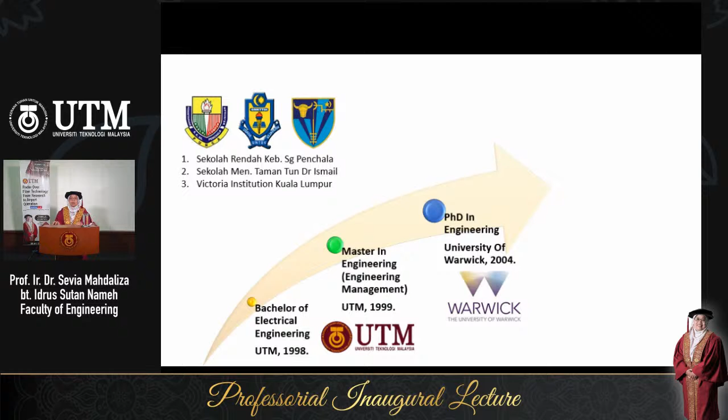Seterusnya saya menyambung belajar di UTM. I am alumni of UTM, bachelor degree and master degree, supervised by Professor Engineer Abu Samah and Dato' Ahmad for my final year project and master's. Professor Abu Samah is my sifu, my academic advisor. He was not just my advisor during my study, but until now as a colleague in UTM. Syukur Alhamdulillah, glad both of you are here, sihat walafiat. Thank you for your guidance since student until now.

Alhamdulillah. Then I continued my study at Warwick, 1999 actually, until 2004, under supervision of Professor Emeritus Roger J. Green, on radio over fiber, with my focus on radio over wireless optical link. Thank you, sir, I believe you are there in England. So happy he's still healthy and cheerful in England. We regularly keep in touch via IG, WhatsApp and also Facebook. I messaged him early morning today.

During my study, my senior next to me there, Dr. Ramirez Inigas, shared knowledge on optical communication. We worked together; he's now with Glasgow University. I graduated from PhD in 2004, with my Viva at Oxford University in November 2004. During that time, examinations were conducted at the external office at Oxford. Thank you, Professor David Edwards of Oxford University, my external examiner, as well as Dr. Mark Leeson of Warwick University, my internal examiner.

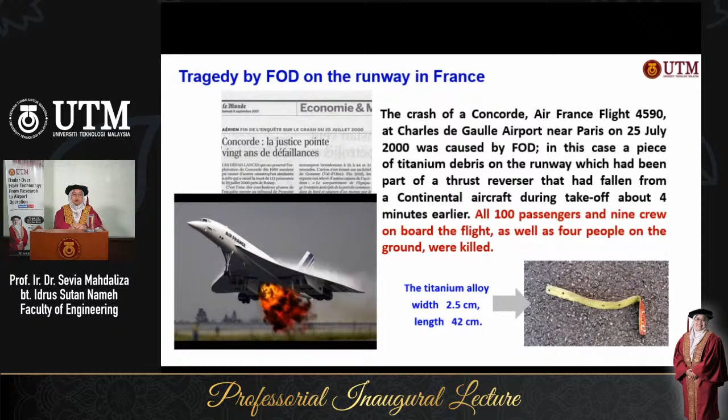This tragedy not just destroyed the aircraft, it also ended the business of Concorde. There is no Concorde anymore. It's history - bad history.

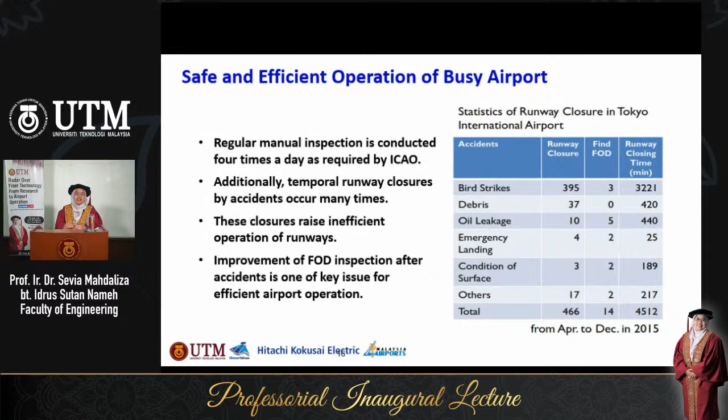Safety and operation of a busy airport require regular inspection, conducted 4 times a day as required by ICAO. Additionally, temporary runway closures due to accidents occur many times. This is a statistic of runway closures in Tokyo International Airport from April to December 2015. There are numbers of debris, and these closures cause inefficient operation of the runway, which is a cost to the airport operator. Improvement of FOD inspection after an accident is one of the key issues for efficient airport operation.

I'd like to share with everyone some public data comparing busy international airports. This report is from the ACI Annual World Airport Traffic Report 2015, showing the estimated direct cost of FOD and the estimated total cost. For example, for Kuala Lumpur International Airport, ranked number 37 in the world, FOD costs KLIA about 1.8 million USD per year, as well as 3.3 million per year in total cost. So we need technology to reduce this cost.

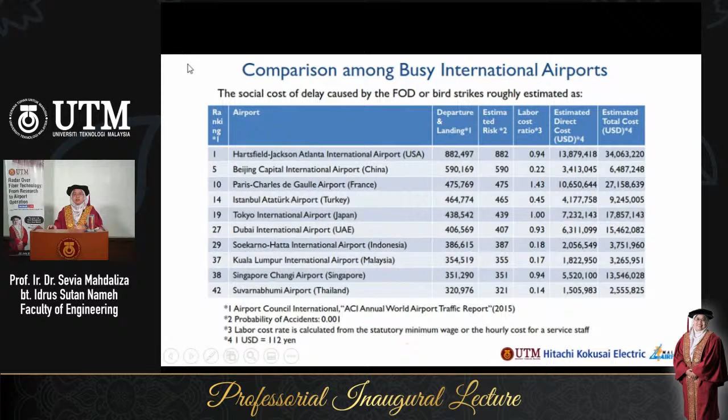One of the available technologies is laser or optical imaging - something like a camera. The camera can focus on the FOD and then inform the airport operator. However, we need a detection system for small metallic FOD. The system needs the capability to detect tiny objects and display the situation of runways 24 hours, 365 days a year, with many restrictions for construction and setup.

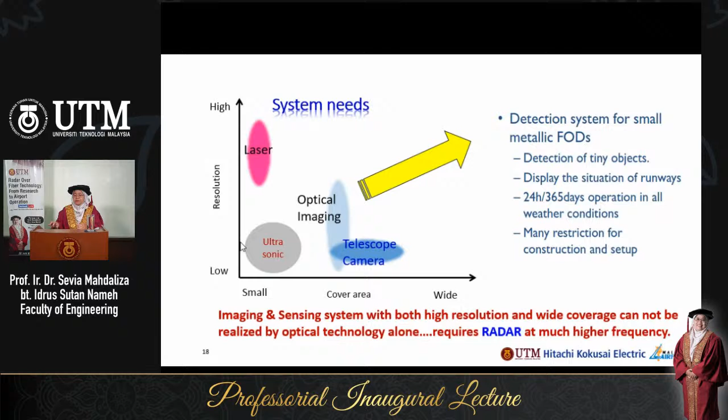In general, through our study, imaging and sensing systems with both high resolution and wide coverage cannot be realized by optical technology alone. It requires radar at a much higher frequency, in the millimeter wave region, because we need to ensure this runway - this is KLIA runway 2 - is clear from FOD.

What is radar? Allow me to share some basic understanding about radar. Radar stands for radio detection and ranging. It's a system that uses radio waves to determine the range, angle, or velocity of an object - to detect aircraft, ships, spacecraft, guided missiles, motor vehicles, weather formations, and terrain. The radar transmitter produces electromagnetic waves in the radio or microwave domain, and a receiver processor determines the properties of the object. There are a huge number of applications for radar.

If you can see here in this photo, there's a marine radar antenna for marine applications, and also airport civilian radar.

Do you have radar at your home? Okay, just ask you, can you spot a marine radar above me there? This is my photo at one of my project sites in Petronas, Melaka. Okay, you can see clearly there is a radar above me.

A little bit again about FOD radar theory. The radar works with the radar cross-section value, which, through the electromagnetic wave, can detect the size of the object and report through special signal processing.

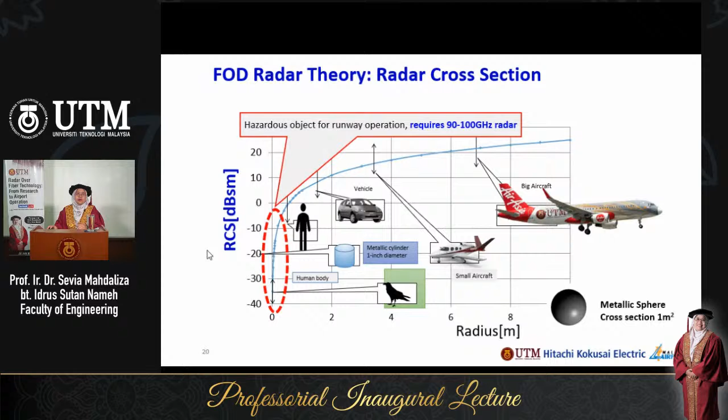So the smaller the size of the object, the shorter the wavelength and the higher the frequency should be. This is the range of hazardous objects for runway operation. It requires about 90 to 100 gigahertz radar.

Just a little understanding of how this electromagnetic spectrum works. If you look here, the source for AM radio, microwave oven, and so on. The size for AM radio, the radio we listen to every day, FM radio and so on, the wavelength is about the size of a building. But for radar and also microwave, it will be size like a butterfly, needle point, and so on.

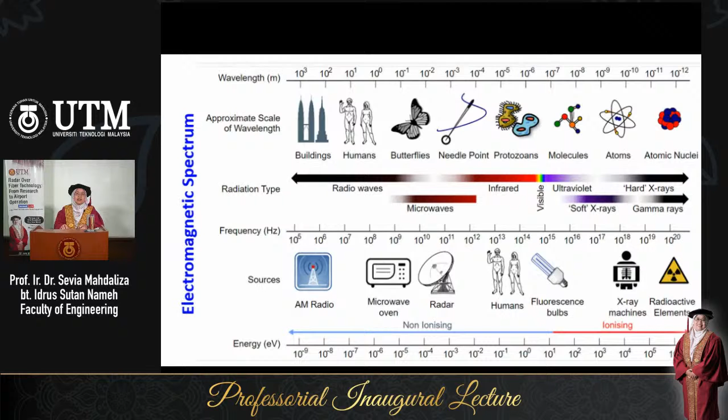At a certain spectrum it is non-ionizing, which is safe, with a certain high power level. And also for the next spectrum, after the visible and ultraviolet, there is the ionizing spectrum, which is soft X-ray, hard X-ray, and also radioactive elements, which is dangerous, but it's really useful with a proper design system for many applications.

Just to give some understanding of what radar is and where it works. For maritime radio and navigation, very low frequency and low frequency maritime radio navigation has a wavelength of about 1 kilometer. The frequency used is up to about 300 kilohertz.

AM radio is somewhere about 3 megahertz. And aviation radio, about 3 gigahertz now. UHF television, our mobile phone, GPS, Wi-Fi, 4G, 5G, and most of 5G now working towards 15 gigahertz to 30 gigahertz. But the FOD radar works at somewhere about 90 to 100 gigahertz. It's really far from those radar available in the airport area.

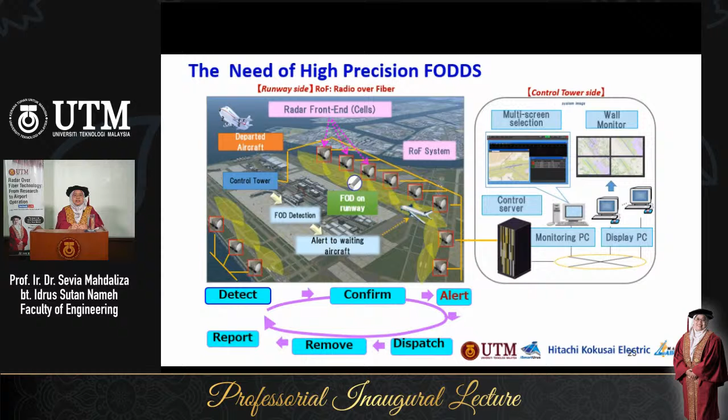The application: first it will detect, radar will detect, camera will confirm, and then alert through the system to the SI staff, dispatch and remove, report back, and open the runway. This is the simple algorithm for this system.

Just for understanding of our day-to-day use of radio fiber, every one of you here are connected through fiber. When you're looking at Facebook, when you're watching this talk through YouTube, definitely at the back end you are connected through fiber around the globe. So this is the example of radio over fiber application: mobile base station antenna, connecting mountain valleys using optical fiber, for tall buildings, and also subway metro.

All right, what is the RoF linear cell radar? The RoF system consists of many remote antenna units, linearly collocated along optical fiber to form a linear shaped cell. If you look here, there is a data center connected through fiber for joint signal processing.

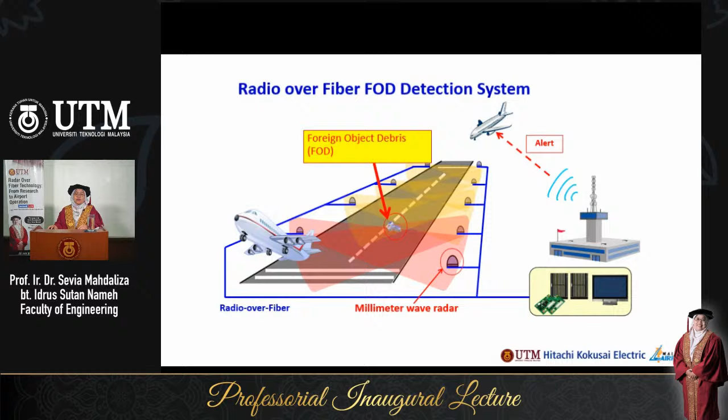There is a sensor head, the radar will be radiated and detect the object. In terms of layout, this is for your understanding of how it works: radio fiber at the back end and the millimeter wave radar at the front end, detecting the foreign object debris. It will send data to the control center and alert the pilot, either takeoff or landing, to make sure the runway is clear before landing.

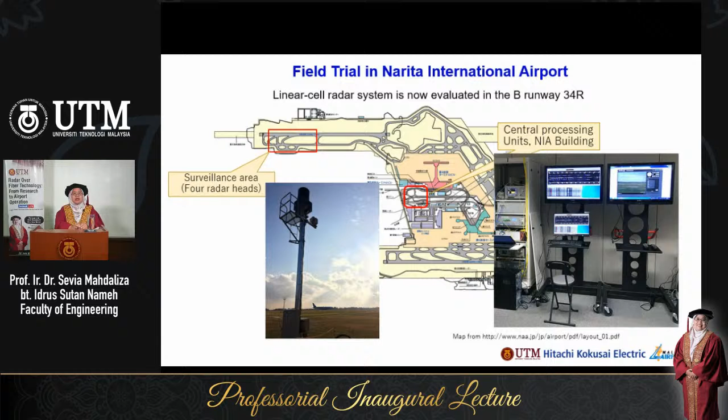And later, with the improvement of design and system, it goes to Malaysia. This is the timeline of FODS Japan Malaysia Joint Field Trial.

It's a 4 year project, and Alhamdulillah, inshallah, it will continue another 2 years after next Japan fiscal year. Thank you, MIC. This started with the fundamental study and experiment 1, field trial planning, system design for KLIA, and fabrication of prototype. Allow me to share the milestones achieved.

First, approved engineering design and construction plan for the FODS KLIA. We got radar configuration and optical networks completion. Then along the field trial experiment 2 and 3, infrastructure and one prototype RAU system were completed.

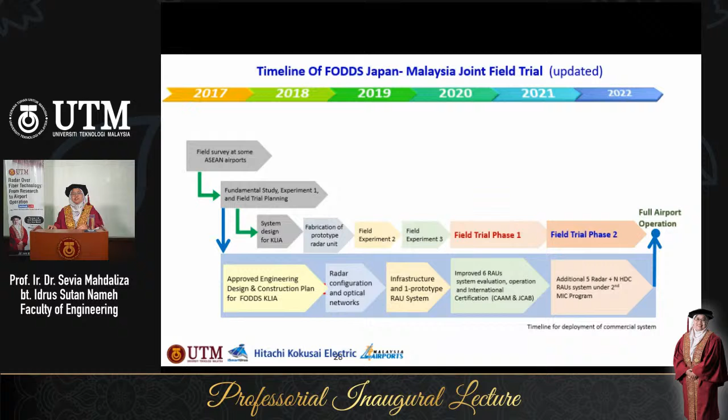We continue with field trial phase 1. Now it's field trial phase 1, and next will be field trial phase 2. This is the summary of our activity at KLIA.

Thank you to the Japan team. Despite the COVID-19 pandemic as well as the Malaysian movement control order, you came here to complete the project together with the Malaysian team. Thank you very much.

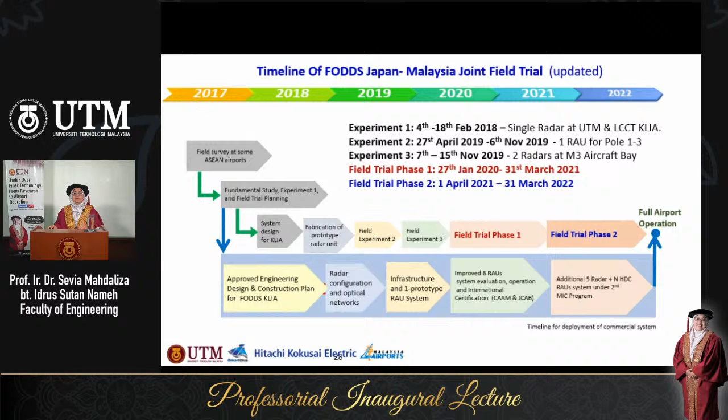We conducted experiment 1 and 2. Now we have almost completed field trial phase 1. Allow me to share with friends here the experiment and development phase. Hopefully you will be confident with this system, confident with KLIA.

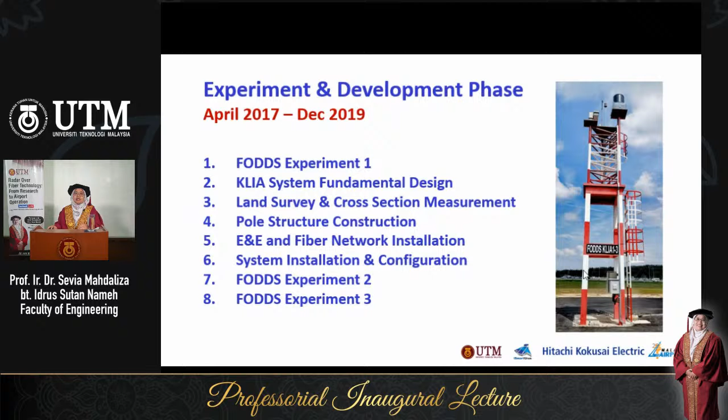First, FODS experiment: KLIA system fundamental design, land survey, cross-section measurement. We did the pole structure construction, E&E and fiber network installation, system installation and configuration, and FODS experiment 2 and 3. This photo shows the prototype, which was in KLIA for about 6 months, then later reinstalled with a new one. The first experiment was conducted in February 2018 at UTM campus and also KLIA.

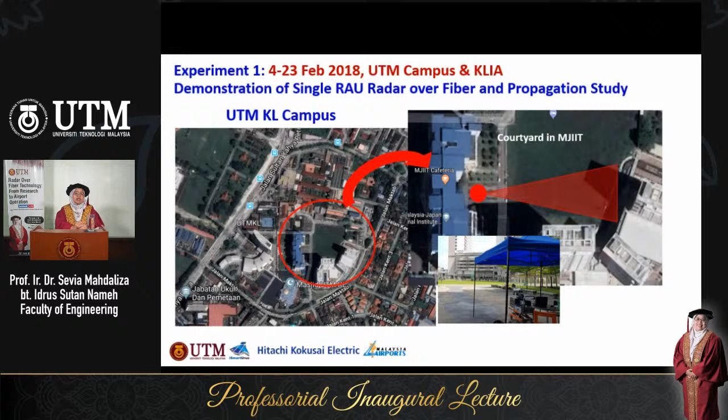It was a demonstration of single RAU radar over fiber and propagation study. We conducted it at UTM Kuala Lumpur campus in February 2018 at the courtyard in MJIIT. Thank you very much for the commitment of UTM KL campus, and thank you to all colleagues in KL who allowed us to clear the parking area during the experiment.

Next year, demonstration of single RAU radar over fiber propagation study at the KLIA LCCT apron, to test the system at the real airport environment.

This is the radar, and we conducted a few experiments just to give you understanding about the radar. You can see our researchers there, Dr. Rashidi and Dr. Farabi, walking, leaving the radar. You can see their signal there. A big signal is moving.

This is how the radar detects, and this confirms to you the radar is safe to the human body. Then Dr. Kano from NICT walks towards them. You can see the huge signal of Dr. Kano walking towards Dr. Rashidi and Dr. Farabi. This is how the radar detects, gives the information to the system, and then later the camera will confirm the existence of FOD at the runway.

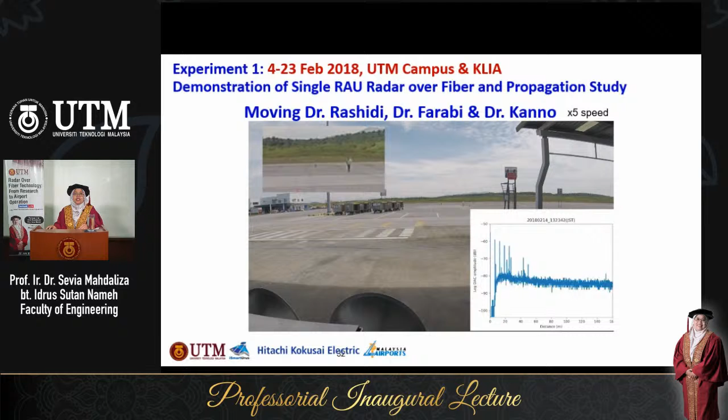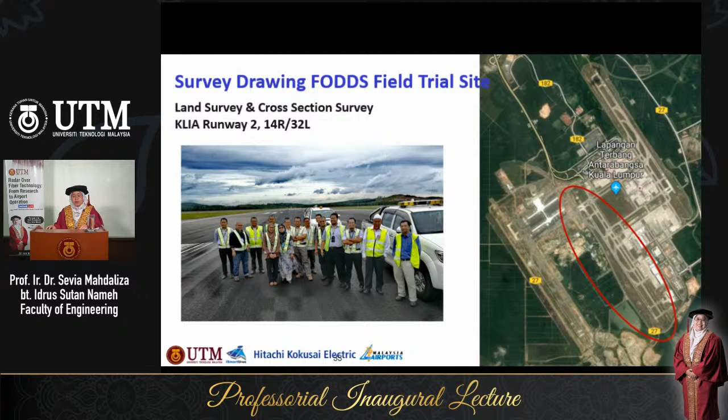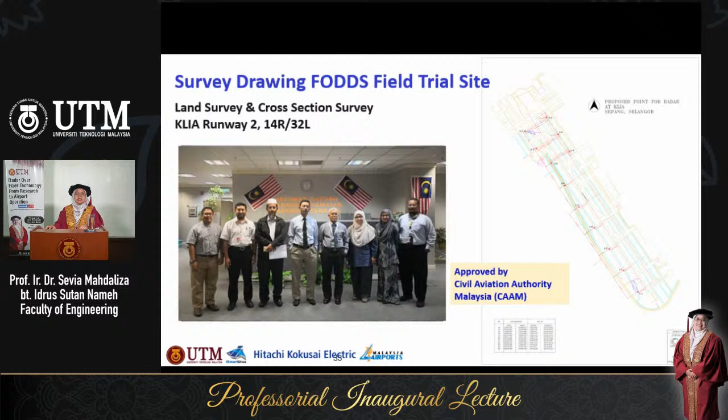We got approval for our drawing, because all the design and so on are according to ICAO Annex 14. We followed all the requirements and got approval from Civil Aviation Malaysia somewhere in January 2019.

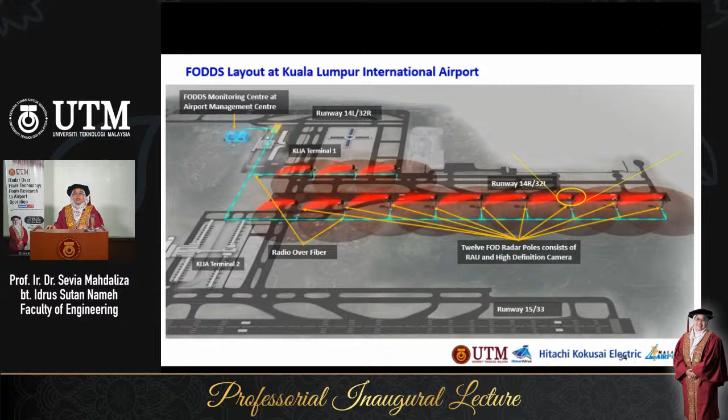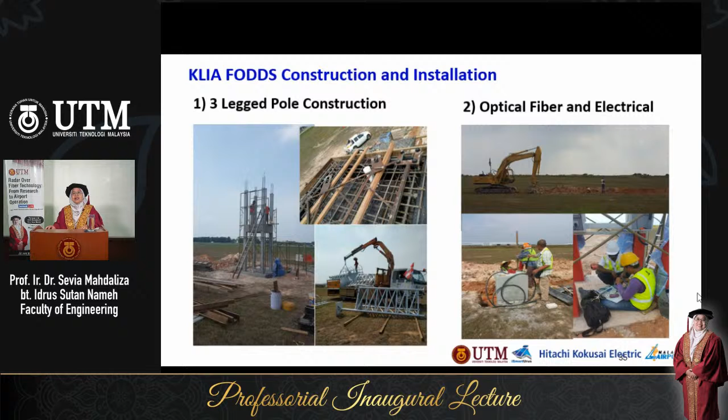This is some photo of the huge commitment made by the collaborators, contractors, and also consultants - three-legged pole construction and optical fiber electrical installation. Thank you very much for the design by Professor Mahmud Tahir of UTM for designing this three-legged radar pole, and colleagues from UTM for all the work. For the KLIA FODDS construction, we worked hard day and night for the installation during that time.

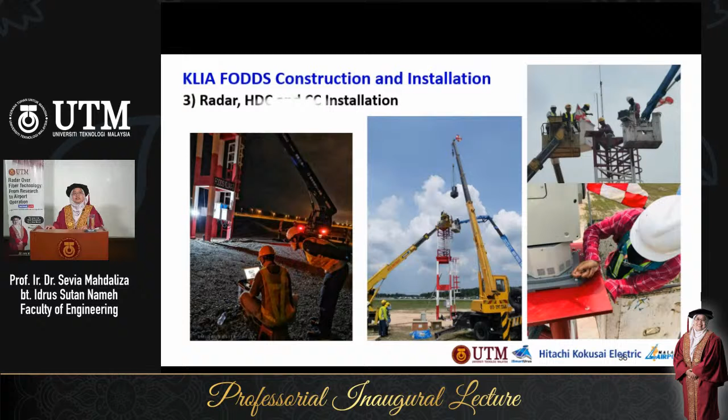Radar, HDC, and also control center installation.

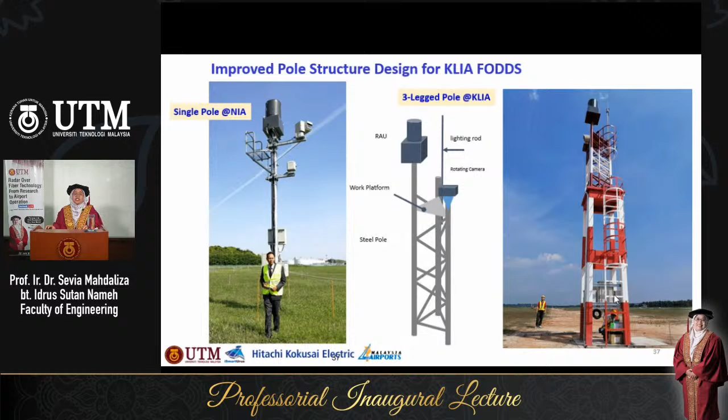The first photo shows the senior manager of Kuala Lumpur International Airport at Narita International Airport, and the next photo is Mr. Kenichi Kashima of Hitachi Kokusai in Malaysia at KLIA.

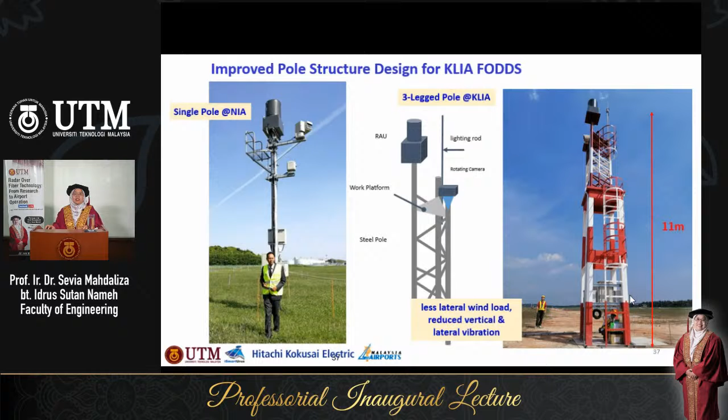This pole has less lateral wind load, reducing vertical and lateral vibration. The vibration study was conducted by Professor Salman Leong.

The radar spectrum license at 96 gigahertz is issued by MCMC. This is the photo, and this is the certificate license to UTM under research.

Some photos to share with you: the control center at KLIA, and also the monitoring center at the AOCC building, visited by our honorable Deputy Vice Chancellor, now our Vice Chancellor, Professor Fauzi Ismail.

To ensure the system works according to the design, we conduct line of sight experiments. My PhD students are involved in this, and colleagues as well, doing vibration testing, FOD sample testing, and system evaluation.

This is the FOD simulator at the runway. Here you can see the FOD at the center line of the runway in the middle of the night.

Then there was a launching ceremony marking a successful Malaysia-Japan collaboration, when everything was completed on 29 April 2019. It marked a significant achievement for Malaysia-Japan relations and received huge media coverage.

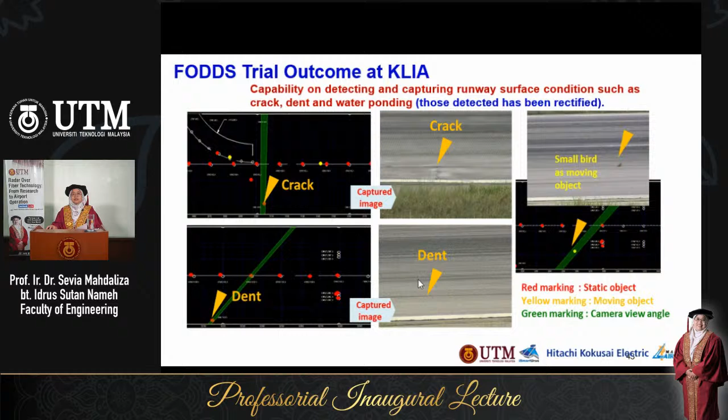This system is automatic - there is supposedly no need for human intervention. But during the experiment, our project manager, Mr. Solah, in the monitoring center reported to inform the duty executive and gave details about the FOD.

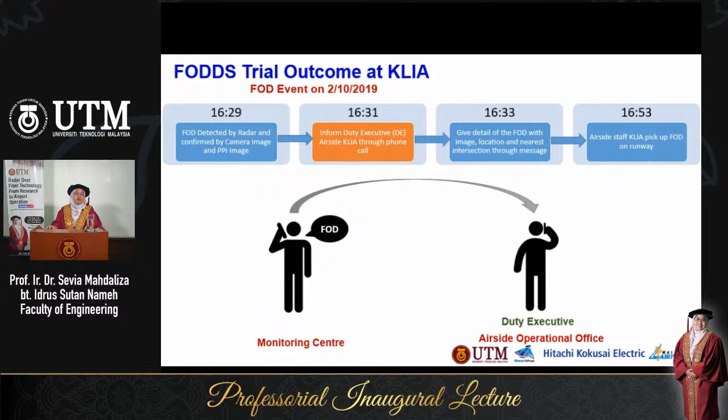And airside staff would click and pick up the FOD on the runway. Because during that time it was an experiment, we needed to call, so we also established a WhatsApp group with the KLIA team to inform them there was a FOD on the runway.

You can see clearly there is a FOD, and there is a video here. The airside team is rushing to the site.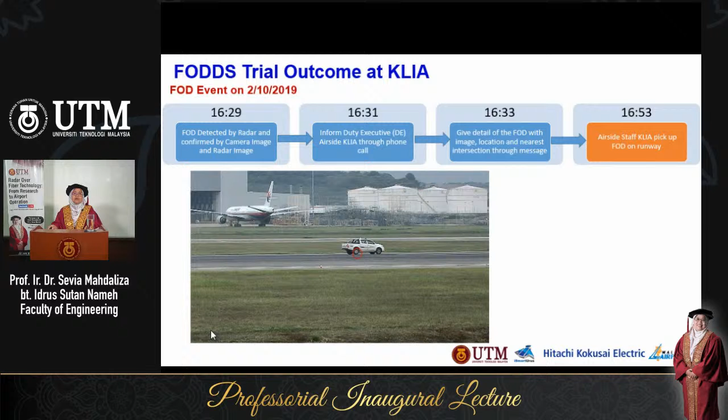They collect the FOD, and the camera automatically zooms in to check whether the FOD is clear or not, then reports back to the duty executive that the FOD is clear. This is the way of communication during that time.

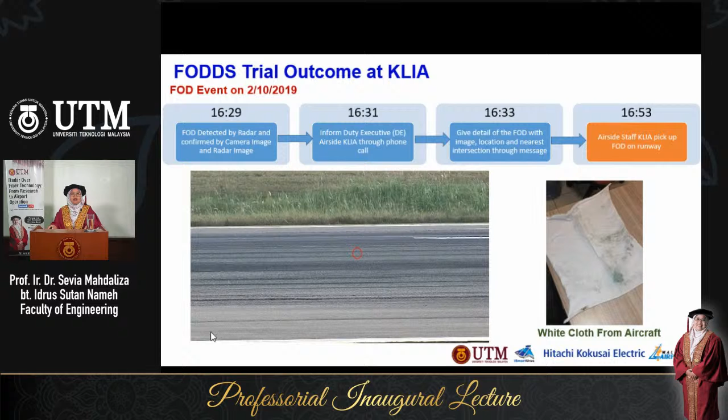White cloth from an aircraft was found during this event.

Through that experience, we came up with the idea of site safety inspection that allows automatic, real-time communication of the FODDS to the airside team. When the radar measures, assesses and calculates, the camera directly zooms and focuses to capture the best image, and the detected FOD data is sent to the user app, ASSI, developed by Asmaul's team for Malaysia Airport. Through that, the airport team can know the location of the FOD, get actual photos of it, and report back once it's removed.

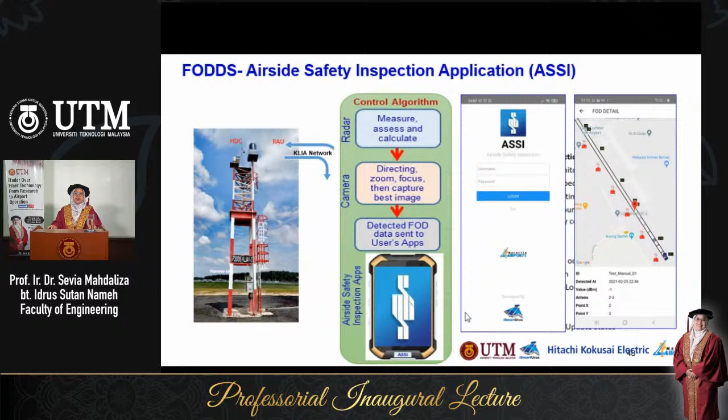The third experiment was conducted in November 2019, led by Professor Kawanishi, to study interference caused by reflection from airplanes.

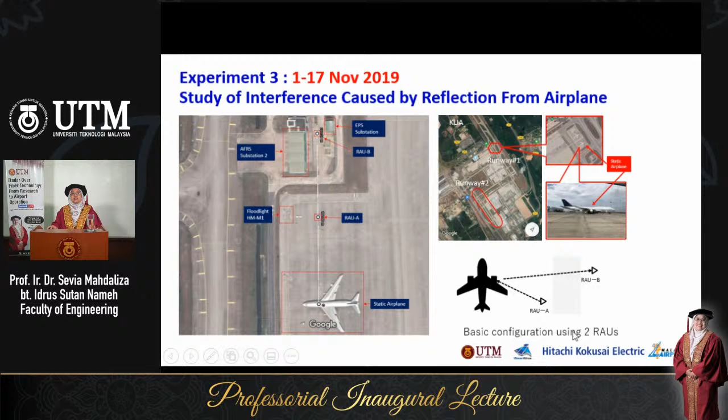This is our lab, located at the apron of Malaysia Airlines in KLIA. This is the arrangement to see the effect of aircraft reflection on the radar.

It was supported by two postgraduate students from Waseda University, postgraduate student Miss Fiza from UTM, and my postdoc Dr. Wan Hafiza, for this experiment together with Hitachi Kokusai and the Malaysia Airport team.

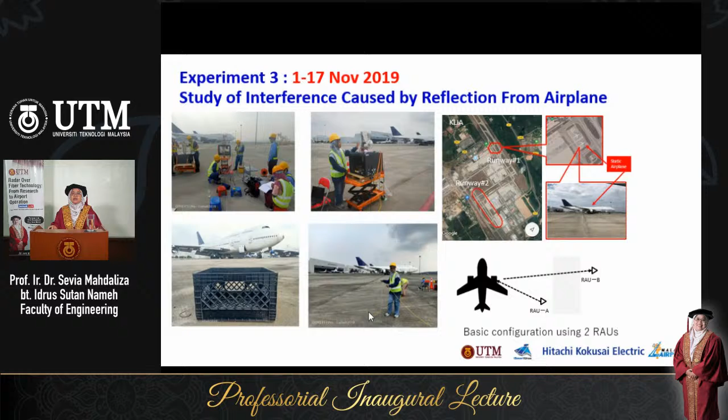During this interference study, Alhamdulillah, thank you very much, there was a courtesy visit by Professor Dato Dr. Ahmad Fauzi, DVC of UTM, together with the General Manager of Hitachi Kokusai Electric, Masaru Adachi.

Also present during that time was Dato Dr. Razin, Chief Safety Officer of Malaysia Airlines Berhad, Tuan Haji Arif, Senior General Manager of Malaysia Airport, and project member officers from Hitachi, UTM, Waseda University, NICT, and Malaysia Airlines. Thank you, Dato. This is our monitoring center at KLIA.

Okay, the third phase, the second phase for FODDS field trial 1 from December to March 2021. Now the system is ready. The focus here is technology and knowledge transfer activity, radar performance improvement, mobilization process from Japan to KLIA, because during the experiment the equipment landed in Malaysia and returned back to Japan, but now the equipment will be delivered to KLIA and UTM. MCMC inspection for special license, installation and configuration, and also MASPS evaluation.

Despite the project delay due to COVID-19, we completed within the time with the hard work of our team members. Allow me to share with you some of the technology and knowledge transfer during this activity.

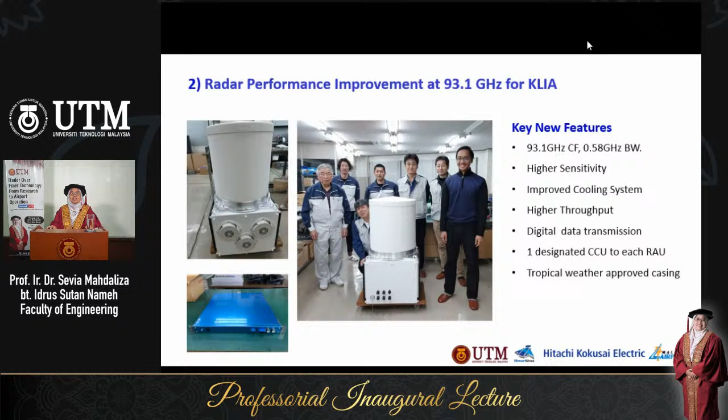Thank you very much. At this moment, KLIA FODDS field trial installation, configuration and evaluation is completed for 6 radar poles and 1 HDC camera at pole 2.3. This is the system - it works now, ready for operation.

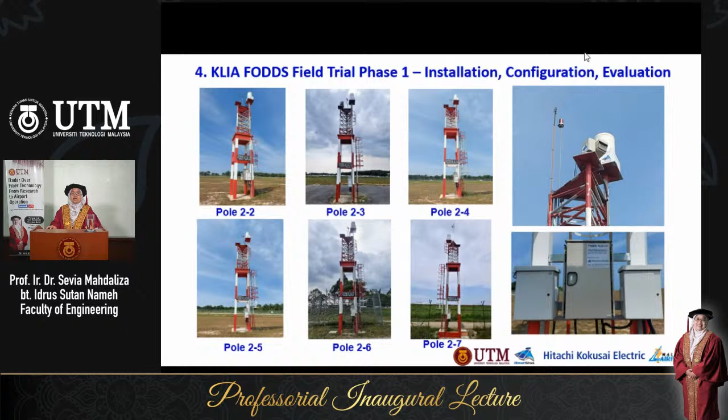To ensure the system works well, we have to conduct the evaluation according to proper methodology. We follow the minimum aviation system performance specification, MASPS, for foreign object debris detection by EUROCAE ED-235. This is the document we referred to, and for this exercise we used 54 types of FOD.

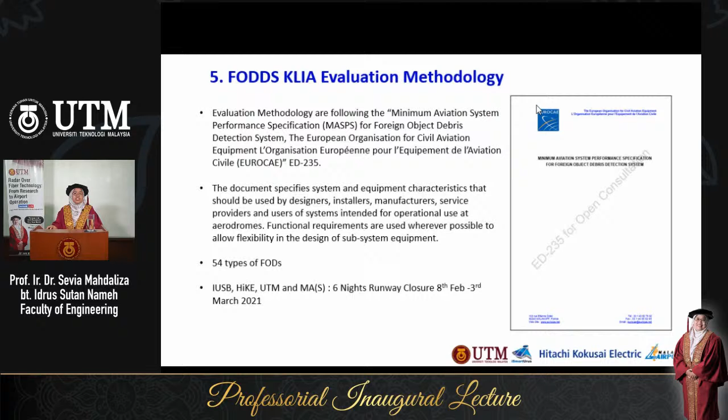Along the way, this exercise also involved and was useful for our students' PhD research works. This is the KLIA evaluation area, runway 2.

A little bit technical - this is how the methodology works. You need to put the measurement area at area 1 and area 2. Alhamdulillah, Malaysia Airport participated and closed the runway. Definitely, the runway must be inactive during this experiment. We conduct it at night most of the time.

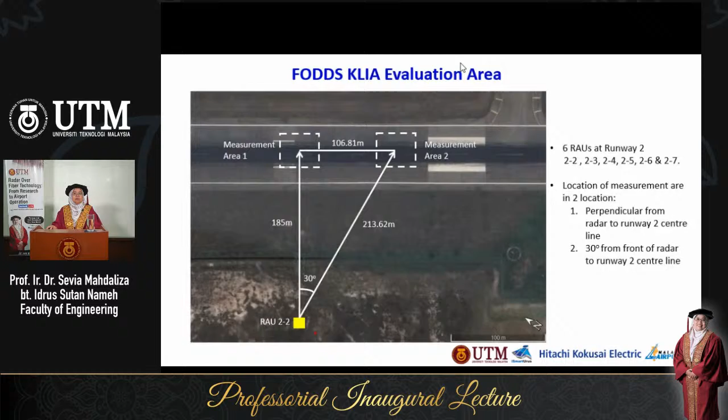FODDS KLIA measurement - you can see here, we need to put 9 identical FOD at the 2 areas, and we need to turn 12 positions, and the radar will collect data. We need to analyze the result and the data to confirm the system performance.

This is the list of 54 FOD for this field trial. This is some of the sample aerodrome and infrastructure debris provided by Malaysia Airport: loose asphalt, concrete chunk, light fitting, and so on.

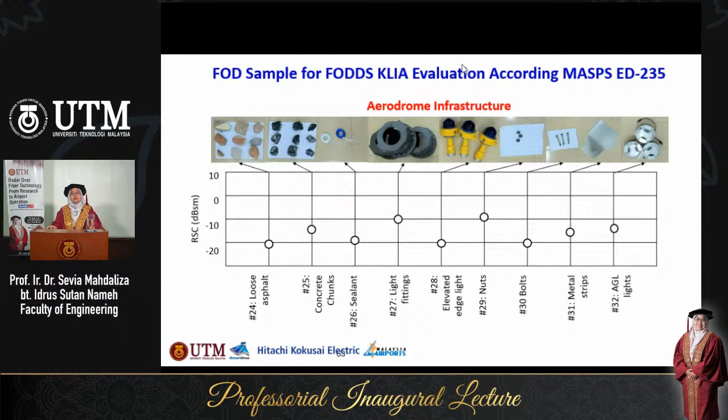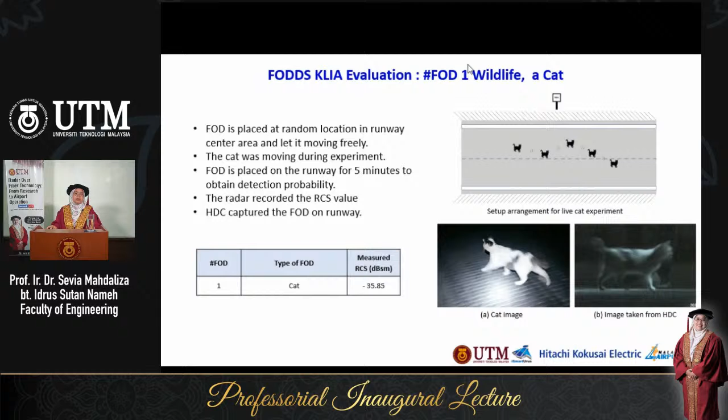We also tested FOD1, wildlife - a cat - during our experiment. The cat measured at -35, and of course wildlife is one of the most dangerous FOD on the runway. We also tested using bird carcass and so on.

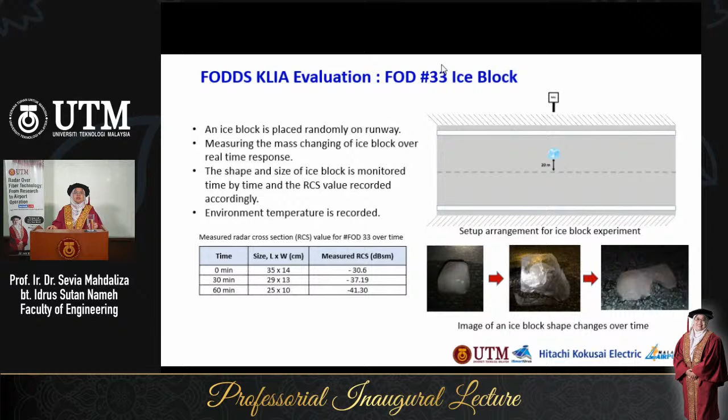We also tested the ability of the FODDS to detect ice block, the RCS value over time. This is the ice we measured, just to show our dear friends to understand about the process.

This is our measurement during daytime - there is a day closure at the airport. FOD will be placed for the measurement area there by the Malaysia Airport team, Mr. Daniel. FOD will be left about 5 minutes to obtain detection probability, and it will take about 36 seconds to detect the FOD at the same place.

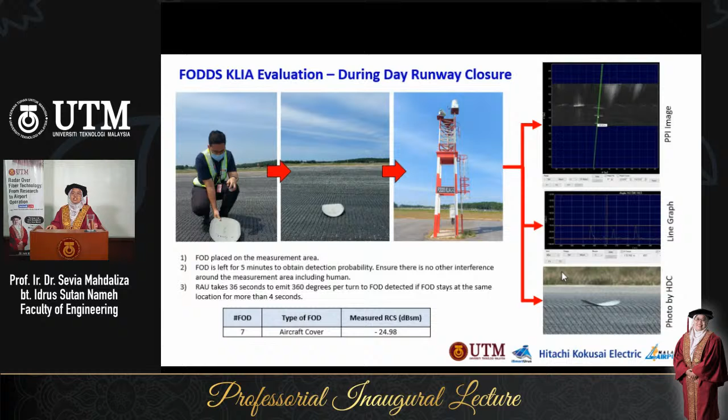This one is actually an aircraft cover, and you can see the result - this one is the PPI image, the line graph showing the measurement of the RCS value, and then the photo taken by the HDC. The photo will be delivered to the site team apps for them to see what FOD was detected by the radar and also captured by the camera.

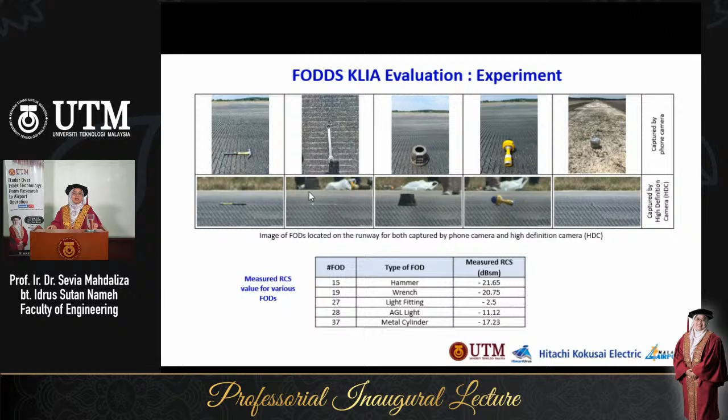Okay, these are all examples of the FOD evaluation experiment. From first, there is hammer, wrench, light fitting, AGL light, metal cylinder. The above photos are taken by our own camera, and the below one is taken by the high definition camera, which is located about 200 meters from the runway center line. And so on, rubber, fuel cap, and so on.

We need to repeat the experiment for the whole 54 types of FOD. Thank you very much, team: Malaysia Airport, Hitachi Kokusai, UTM, also Isma Urus.

The above photo is usually what we take with our own camera. The lower one is taken by our team who control at the control center from the HDC. We make sure any FOD that we conduct for the experiment, we will look at, we will check and collect before end of the experiment.

Alhamdulillah, everyone. Last week, on Friday, 26 February 2021, we conducted a project progress meeting and demonstration to MIC Japan, witnessed by first and second Secretary of the Japan Embassy, JCAB Japan, ENRI Japan, UTM Vice Chancellor Representative Professor Safian, Senior General Manager Haji Arif of Malaysia Airport, Division Secretary of KKMM, Head Division of MCMC, and Civil Aviation Representative.

Alhamdulillah, everything went well. All the hard work of the members of Hitachi Kokusai, Malaysia Airport, UTM, also Isma Urus, is done, complete. Despite the COVID-19 pandemic, the installation configuration was completed as planned. Inshallah, everyone, the 6 radars are operating well to ensure runway safety at KLIA.

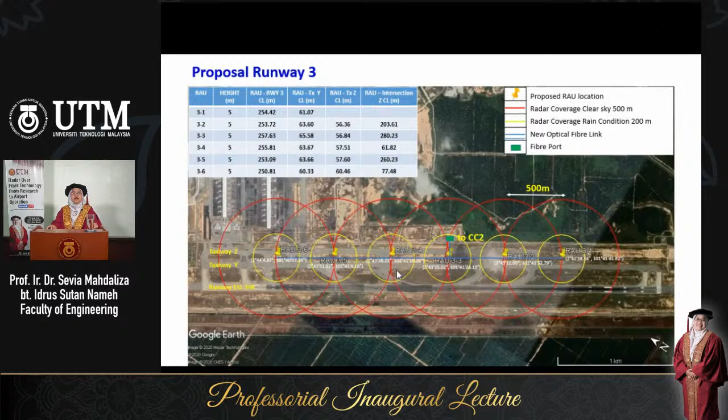Okay, this is the proposal just to give you some idea. For runway 2 and runway 3 of KLIA, they only need about 6 radar units for this application.

Usually, this is the thing that we need to work on. So why do we need to do this experiment, why do we need to do this project, why do we need to work so hard? Because we need to contribute back to the society, contribute back to the nation and also to the global community.

This is one of the key outcomes of this project: contribution of Malaysia to the International Telecommunication Union Radio Communication Sector Group Meeting 2019, 2020, 2021, under Working Party WP5B, where we proposed revision to the working document towards a preliminary draft new report ITUR on technical and operational characteristics of foreign object debris detection systems operating in the 92 to 100 GHz frequency band. Thank you very much, KKMM, for your trust and confidence to send me there to represent Malaysia.

Thank you very much. This is some of the joint publications between UTM, Hitachi Kokusai, NICT, ENRI, and Waseda University. There are a few research papers, but the key one I would like to share here is the contribution of Malaysia again to the ICAO Foreign Object Debris Detection System, FODDS, at Kuala Lumpur International Airport.

All right, this is the impact and benefit of this project. Allow me to share and wrap up again. This is an example of Japan-Malaysia collaboration, high-end Japan technology transfer to Malaysia. It's the first radar in Malaysia at 90 GHz frequency range, enhancing innovativeness and technology advancement.

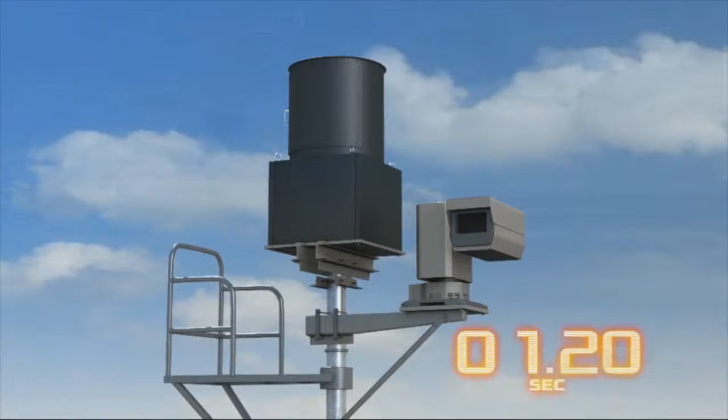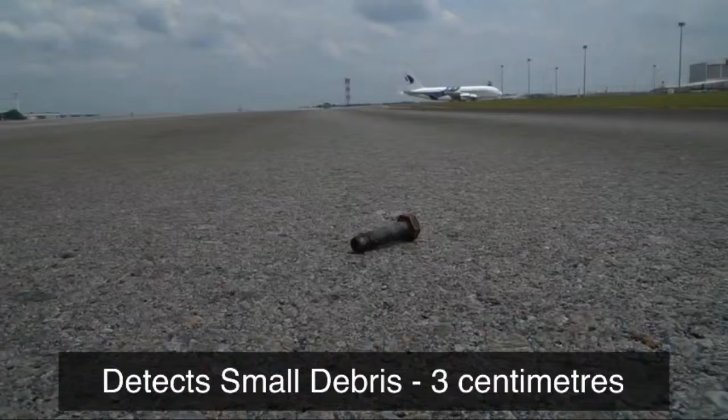We are delighted to have embarked on this G2G collaboration between Japan and Malaysia. Japan has long been a country with great technological advancements, so we are pleased to have this opportunity to learn and adopt new technologies, especially in view of our ongoing Airports 4.0 initiative. The implementation of the Foreign Object Debris Detection System, or FODD, has brought great benefits to Malaysia airports. As an airport operator responsible for ensuring the highest level of operational safety, we are keen to embrace technologies that enhance safety and improve operational efficiency. On behalf of Malaysia Airports, I would like to thank all parties involved in this innovative project, including the various Japanese organizations, and also University Technology Malaysia, who contributed expertise and guidance throughout the project. Thank you very much.

Alhamdulillah. Thank you very much, Prof. Sevia, for enlightening us with the extraordinary journey you have gone through in bringing radio over fiber technology from the laboratory to the practical field, through the field trial of the linear cell radar over fiber FODD detection system at KLIA. I believe we are all inspired now, seeing how you have brought your research work to a much greater height. Now I would like to invite Professor Engineer Dr. Abu Samah bin Muhammad Sutan, who is also the Chairman of the Research Alliance in Innovative Engineering, to review the professorial lecture. Over to you, Prof.